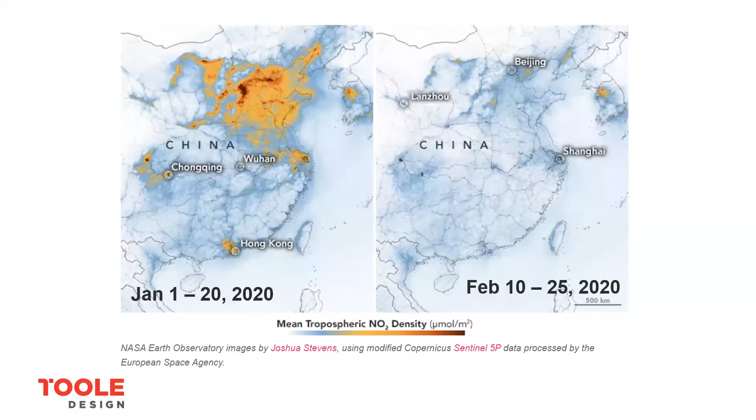Third, I want to address an issue right up front here. Several of our clients and colleagues have reached out to us to ask if we are suggesting strategies that go against orders that require people to stay at home, strategies that might result in more people outdoors and in close proximity to each other. And there have been concerns about people flocking to parks and trails and creating conditions where the virus can spread. In fact, I don't think that all health departments are necessarily in agreement about this, but clearly there are some outdoor activities that can be safe if we can do them in a way that's physically separated from others.

So no, we're not suggesting that people congregate in the same place at the same time. Rather, we want to create conditions where there are many more safe places for people to walk, bike, and run, using safe distancing strategies. We need more space, not less space, for these activities. And we also need to acknowledge that there's a critical window of time in the next couple of weeks where we need to be limiting interaction to the bare minimum. And we certainly need to be careful about doing things that could attract a lot of people to one location.

I think there's a few factors at play here that I want to talk about. We need to remember that physical activity and time outside of the house is absolutely essential for humans to maintain their physical and emotional health. There are volumes of scientific research that tell us that being outside and experiencing nature, even if it's just a street tree, brings a wide variety of physical and mental benefits to humans, in fact, boosting our immune system. Even as little as 30 minutes of exercise a day, a simple walk, boosts our immune systems and makes us healthier. So we need to find ways to enable people to safely go outside.

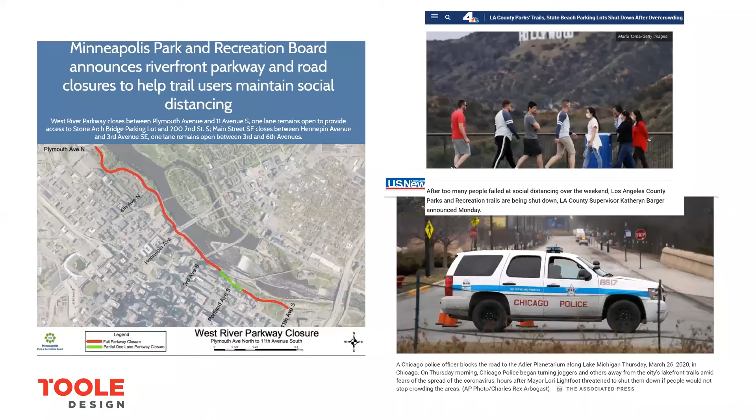Thinking ahead again to a time when we've had extended periods of isolation and when businesses and workplaces are gradually reopening, having enough space on our streets and sidewalks is going to be important. We have an opportunity now to experiment with some things to prepare for that time.

Finally, when this is all over, there will be more people working from home than ever before, like your three presenters today - these are our home work environments. We'll have figured out it's possible to work from home and still stay connected to colleagues. I might have to invest in an actual desk instead of a card table, but a lot of people are predicting things won't go back totally to the way they were before the pandemic.

People who work from home are going to need to be able to access trails and safe streets and parks for their mental and physical health. Which brings us to the topic of the day: rebalancing streets for people.

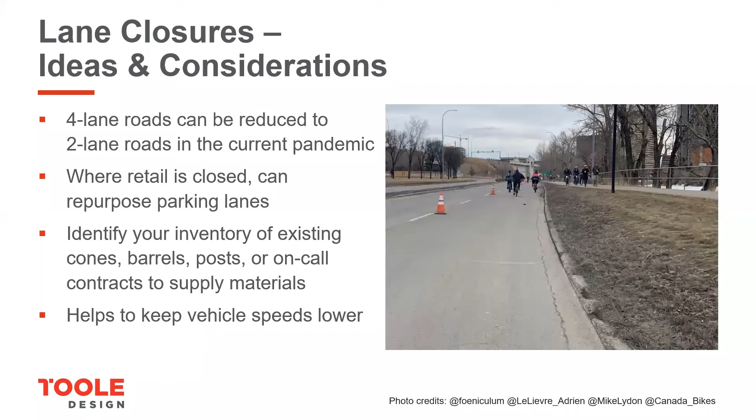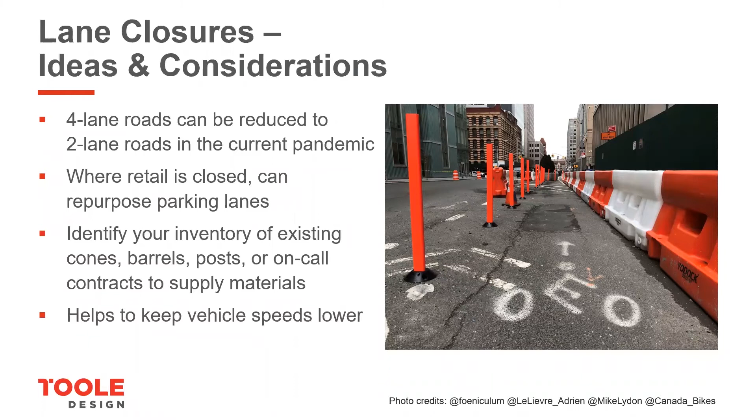The challenge with a lot of typical road diets is that we're often trying to go from 4 lanes to 3 lanes, and that often means changes in signal operations and changes in the locations of signal heads over the lanes—a whole lot of extra work we don't have time to implement in this crisis.

So we're looking for opportunities where we don't have to make those physical changes, and can essentially just cone off the outside lanes and provide that space as overflow from the sidewalks or dedicated bike space. We also have opportunities to repurpose some parking lanes in locations where retail is no longer functioning—not suggesting we close parking needed for drop-off, pickup, or commerce, but there are some locations where that parking could be repurposed.

The first step is to really understand what resources we have at our disposal: what cones, barrels, or potentially flex posts do you have in your existing stockpiles? What existing on-call contracts do you have with contractors, and what's already in their supply? These are the first calls that need to be made to understand what materials you have to work with, so we can understand how much can actually be implemented with these street changes.

The other potential benefit of changing these lane configurations is that we can narrow up the travel lanes and help control vehicle speeds, not only along the lengths of the corridors, but being deliberate to ensure turning vehicles are doing so at a safer speed where we know we have more people crossing the streets.

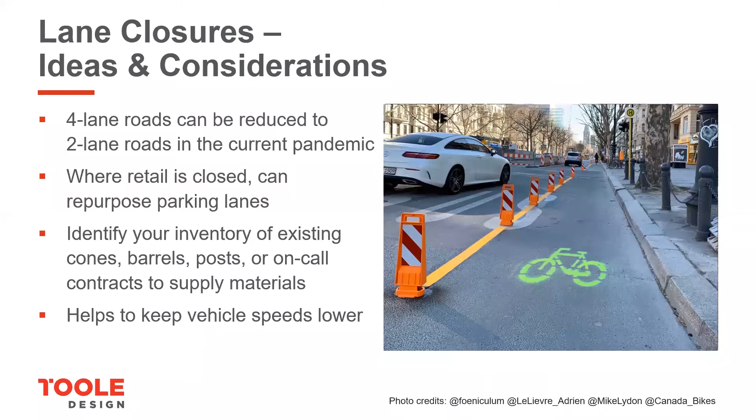There are some other considerations that are more context sensitive: we have to look at how the existing street networks are operating, and whether there are existing land uses along a road causing queues to form—people queuing outside grocery stores or other stores, forcing people out into the street because there's simply not enough space on the sidewalk. That's a natural opportunity to carve out these additional spaces.

We can also look to places that are already doing this—places with farmers markets or other regular events where public agencies are already frequently closing lanes and or closing streets entirely to vehicular traffic. We already have those plans at our disposal. Many communities have also done pop-up events, so we have traffic control plans and ways of setting up these roads that don't require a lot of physical implementation. We can pull these plans off the shelf and relatively easily implement them to provide these benefits.

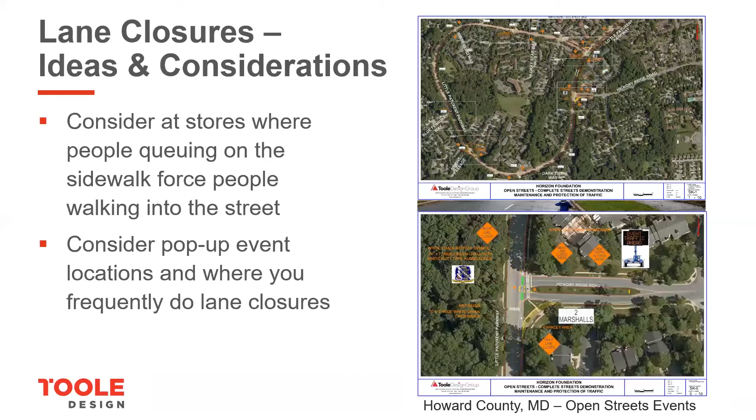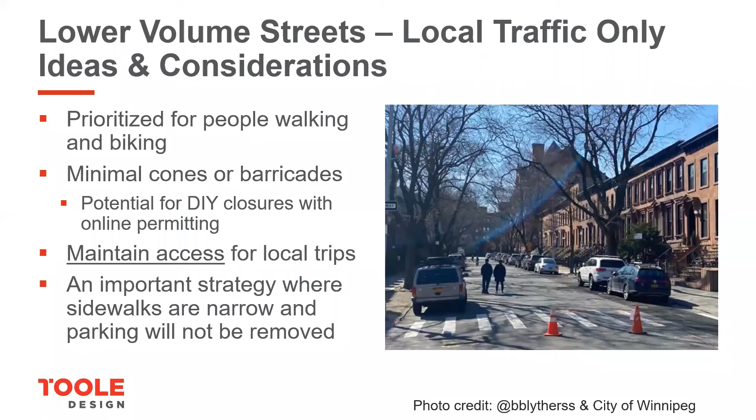We also have to recognize that not all roads are going to be 4-lane roads, and frankly some roads just don't have the volumes that would warrant significant changes. On a lower volume street, it would be fairly easy to just close that street off, indicate it's for local traffic, and allow that space to be a little more comfortable for people already using it for walking and biking.

These are also things that could be done with a relatively simple online permitting process—print out the permit, put it in a Ziploc bag, stick it on the back of a couple chairs, and use that to signify you've gotten permission to close off your street. This takes some burden off public works officials who are already dealing with a lot of other things, while still going through a formal process.

We do want to make sure that roads are not just being closed by residents without any sort of thought to an overall network or overall connectivity. We also want to make sure that we're focusing on local access because we have a lot of deliveries to these streets, so we need to be focusing on that as well.

And I sort of mentioned this before, but recognizing that we have to know where our streets don't have enough sidewalk width, and look for those opportunities to carve out the street space for people walking.

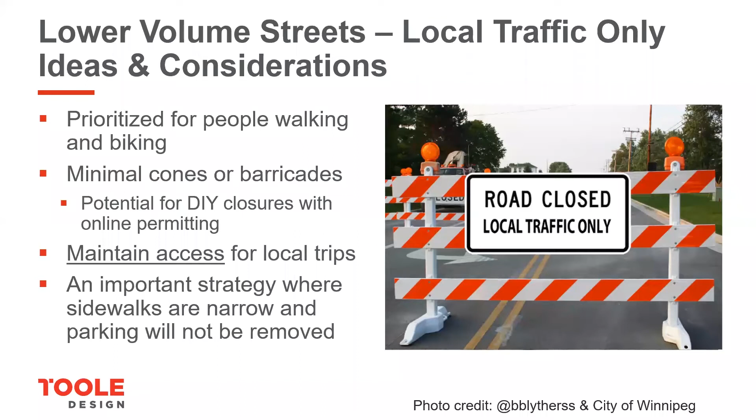We've also seen pretty much across the country that our shared use paths, which were in a lot of places already too narrow, are really feeling the burden of these types of changes, that you can't really accommodate social distancing with the volumes of users that are using these facilities. So looking for opportunities for parallel routes to these shared use paths, so that when people are naturally going to these locations, they already see that there's another opportunity to use a parallel facility and not have to come into close contact with other people.

We can also look for opportunities to separate bicyclists and pedestrians. This was already an existing problem on a lot of our shared use paths, but now with these increased volumes and a need to be more separated, it makes the need for separation even more important.

Another low-hanging fruit is we don't need people to be touching push buttons. I see that a lot of communities have already latched onto this idea, gone into their signal cabinets, and put the signals on pedestrian recall. Yes, it means there's some additional delay associated with the pedestrian crossings, but given that we don't have the volumes of vehicular traffic on these streets anymore, and we don't want people congregating on corners, making this change makes a lot of sense.

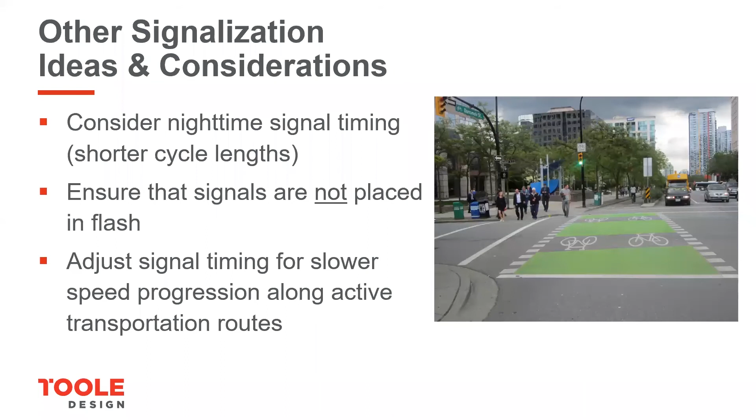And as I said, we don't want people congregating on intersection corners because it becomes more difficult to keep our separation. So keeping cycle length short—a lot of our signals already have nighttime signal timing that is set for shorter cycle lengths. We can flip that switch and use that throughout the day so that we don't have people grouping up on intersection corners and then similarly needing more time to cross because they have to leave those natural gaps between people. I guess I would discourage people from using signals in flash mode, particularly when you have lots of pedestrian traffic.

The caveat to that would be if you're switching it to flashing mode and it's functioning as a stop-controlled intersection—that may be an opportunity as well.

Another thing we can look at is for routes that we're going to prioritize as pedestrian and bicycle routes, we could look to adjust the progression speeds along those corridors. It might throw some of the timing out of whack in terms of the overall grid, but if we're going to prioritize a particular route as a pedestrian and bicycle route, it's something worth considering for those types of corridors.

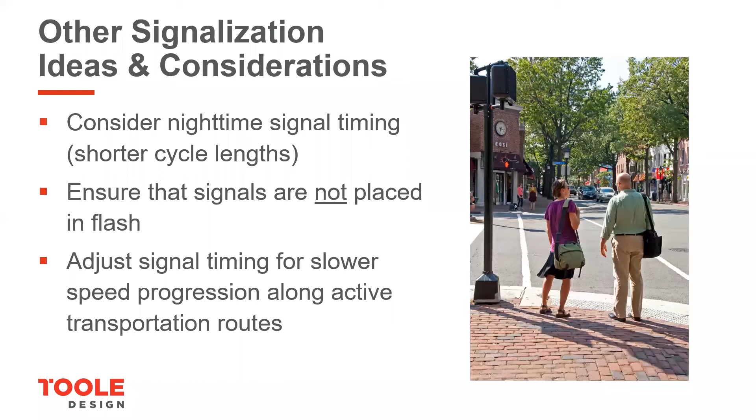Some other ideas—this first one at least will need to be very context sensitive—but there may be opportunities to move on-street parking to existing underused parking lots or garages, since these are currently unused spaces. If that's an opportunity in your neighborhood, you could move cars and then be able to repurpose that space on the street for people walking and biking. That's another potential opportunity.

We could also use, in addition to what I talked about before on closing lanes and ensuring at intersections that we're keeping speed slow, work zone type installations where we're lowering the speeds and clearly communicating what the expected operation is for motorists. This is really no different than what we're going to have to ask of bicyclists as well, that we need to be acting responsibly. We also need drivers to be driving responsibly so that we're not increasing the flow of people to hospitals. We need to really focus on speeds and reduce serious and fatal crashes at this time.

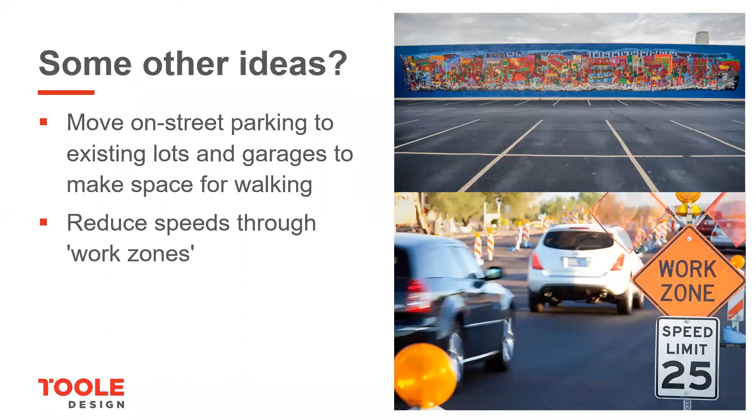So what are some of the planning considerations that we need to focus on? We've seen in some communities that park spaces are being closed because they're sort of natural gathering spaces—they're the places that people already want to go, and they just don't have the capacity to accommodate the number of people that are using them. By comparison, the routes that we're talking about—these carving out lanes and closing roads—they're not intended to be destinations.

They're really just to provide people this location to be able to move along a street, get to their destinations, whether it's the grocery store or just to get a little exercise, and not really to gather. There are ways we can structure these configurations of road closures and lane closures so we're giving people natural loops to get exercise. That can be part of the messaging—for example, doing one loop of this laid out route would be the equivalent of about 30 minutes worth of exercise.

So having that clear messaging of what the purpose is of this facility and how people are supposed to be using it. But as we're laying out this network, we should also be thinking about ensuring we're providing access to essential services, whether that's people walking from their house to the grocery store or ensuring that the people who work at these places are able to get there.

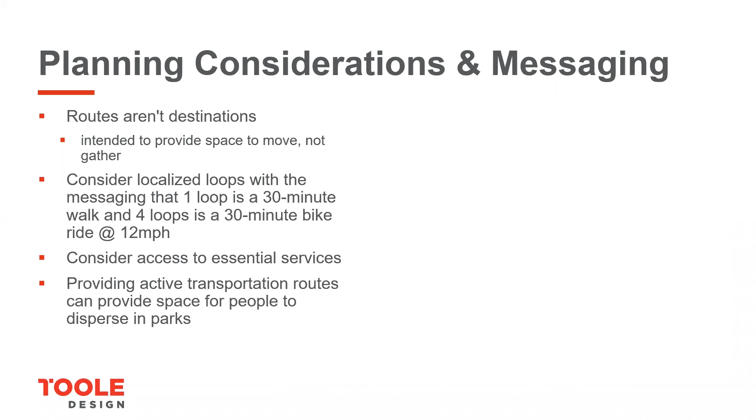One other aspect of this is that doing this may free up public space, so public parks may not be as overburdened, and adjacent trail networks may not be overburdened because we've carved out the space. This is what we've seen places like Minneapolis doing. The city of Philadelphia similarly did it with some of their park frontage roads, repurposing space that was already being underutilized.

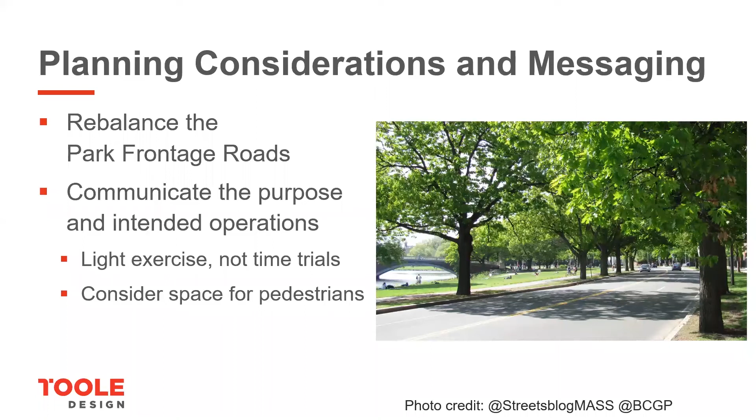As I said, we should be communicating what that purpose is. We're not looking for that time trial cyclist, the person training for a triathlon, to get out there and be traveling quickly—it increases your risk of crashes, particularly with the increase of people using these facilities. We're really just intending for this to be some light exercise so people can get their heart rates going, get a little sunlight. I know those in Minneapolis have gone through a long winter and are really itching to get out of their houses.

And as Jennifer said, you can't keep people indoors for eternity. So we're sort of planning for that.

In addition, as I talked about with shared use paths, we can think about carving out separate spaces for pedestrians and separating them from bicyclists, because we have two different users of different volumes and different speeds. When we allow them to mix at too high volumes, we're either going to create too close contact or this challenge of increased crash risks between those users.

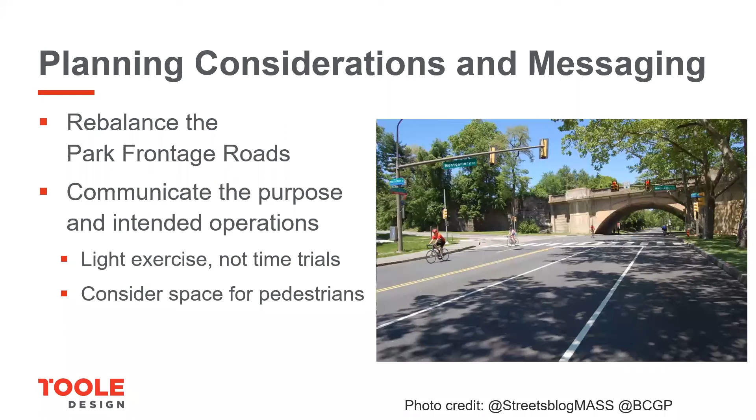That's why it's important to be thinking about providing accessible routes for these communities so that they have the same opportunities to get out and do some active transportation and breathe some fresh air.

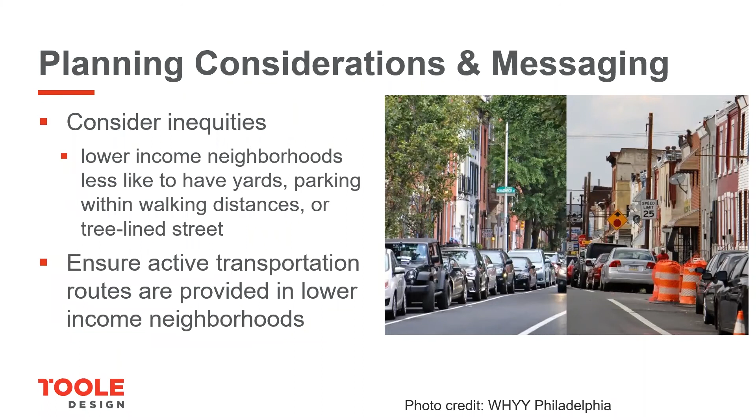I cannot overstress the importance of clearly communicating what the intended operations are for these facilities, whether that's through signage—so the city of Arlington made it clear that the trail systems were closed to group rides. That's going to be really important.

Providing guidance on maintaining social distancing—one of the questions we received prior to this presentation was people asking whether you should mark the entire length of these corridors to clearly communicate social distancing. I think that may be a little too much, but we can provide visual cues at the beginning of these routes that illustrate what 6 feet looks like, so people can commit that to memory and be naturally guided by this.

I think we as agencies also need to be looking at getting feedback on how these facilities are working. You can use social media to monitor it, encourage people to use hashtags, so that even if your agencies aren't able to get out and do actual observations, just combing social media and seeing photos and written guidance about what people are seeing and saying will help us better understand how these are working and make adjustments as necessary.

We can also repurpose all the materials that bike advocates and other groups have already prepared, tips on safe cycling—that's the type of material that can be repurposed.

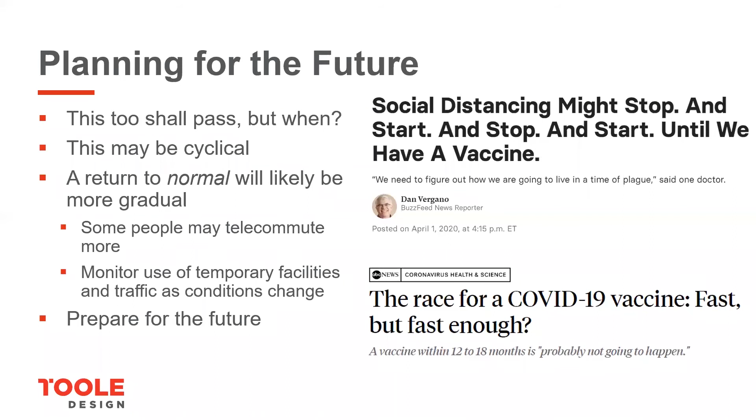And then finally, as we do move out of this, we need to be thinking about implementation strategies for the future, and how over the summer we could potentially build out some bike networks that have a little bit more permanence, but are going through a formal process.

One thing we want to stress with all of this is we're suggesting making changes to the streets as an emergency measure. We are not suggesting this is a way of cramming some infrastructure down people's throats without a formal public engagement process. This is really important to stress when discussing these types of facilities with the public—that if we were going to implement this permanently, we would go through the normal process.

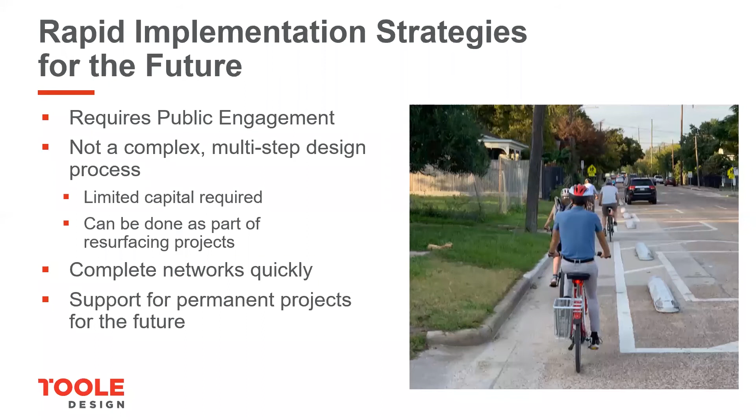By following rapid implementation, you're not building curb lines, you're not doing things that are going to cost a lot of capital, and it can be rolled out quickly to complete these networks. And I think that's what we need to have in the back of our minds to set us up for the future. With that, I'll turn it over to Gwen to talk about some public engagement.

Hello everyone. One of the questions I'm going to be talking about is how do we ensure the public has a voice in any of the decisions that are made now? Some key points: the main thing is that you have to be transparent around the decisions you're making. There should be rationale and some explanation for why you're doing what you're doing. You should also solicit public input on where additional space may be required.

As has been noted throughout this presentation, apply the changes consistently throughout communities. There are inequities being brought to light via this situation, and we need to make sure that through these efforts we are addressing those head on. One particular note is that it's important to continue focusing on equitable outreach more than ever—there are many people who aren't familiar with digital outreach or don't have access to participate, so that will be important.

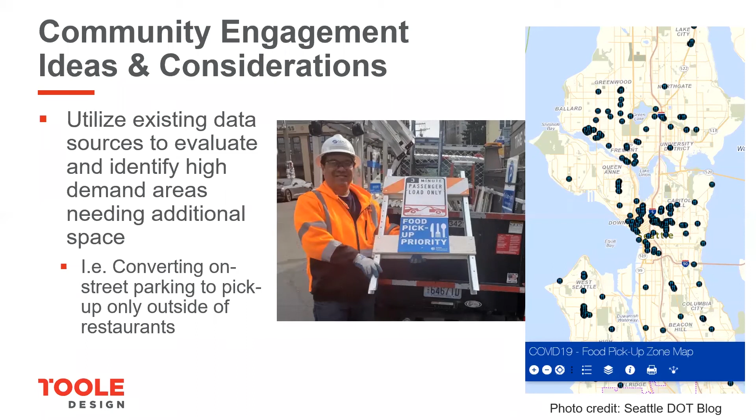Zoom and other tools have a lot of different features, and I think they're going to continue to come out with more as we enter this time. As these changes get implemented, it's important to continue to involve key stakeholders in the process and decision making. With the focus of reaching typically underserved communities, engagement will be challenging, but that does not mean it shouldn't occur.

Setting up community partners could be an additional way to alleviate city staff. Those community liaisons could reach out to the community virtually and host virtual meetings.

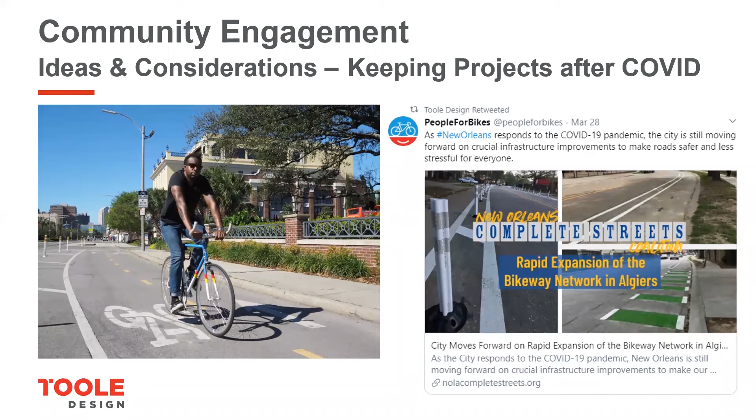This is not the time to be advocating for bike and pedestrian projects in the traditional sense, but capacity pending, it may be a good time to show what's possible in the future. Existing resources and outreach efforts may be possible to use for current projects or adapted quickly and easily as resources to apply those projects and efforts distributed throughout the community.

Luckily, there are a lot of precedents to point to for examples of rapid implementation. Pre-COVID, the concept was known by many different names: rapid implementation, quick builds, demonstration projects, pilots, pop-ups, tactical urbanism. Though the context and application is completely different for today's crisis, the principles from this implementation approach are very valuable. The resources will need to be adapted, but there's many to pull from.

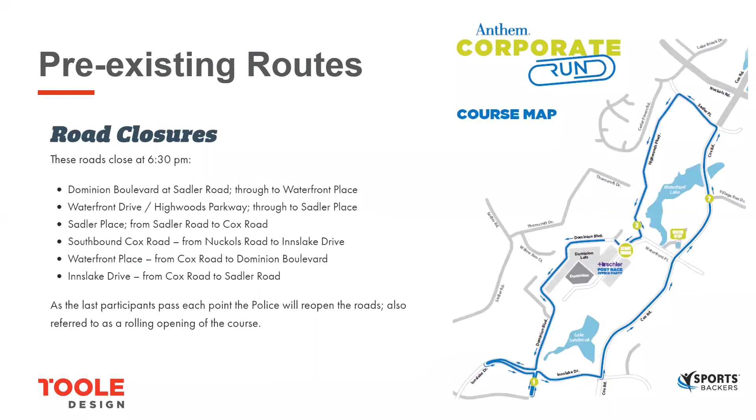We can also think about pre-existing routes. Pretty much every community has ready-made courses and routes that are closed down for events and parades, or 10K and 5K runs. We may already have traffic control plans in place for these yearly events that we can draw upon.

But we also need to think about local streets that we can repurpose as walking and biking streets. We can plan these in areas where there are other easily accessible alternative routes for emergency access.

We need to think about the time of day of restrictions and also consider the capacity of our local public works staff. Just like everyone else, their responsibilities are changing during this pandemic. We need to look at their workloads and make sure they have the capacity to implement these solutions, and also make sure they are safe while doing those things.

There are a lot of resources available and growing by the day. In addition to social media, sites like Streets Blog and Strong Towns are other resources to see what communities are doing. NACTO just launched a resource guide, a place to catalog what transportation agencies are doing in response to COVID-19. Tabitha Combs at UNC is compiling a list of cities making space for social distance for pedestrians and bikes. We'll send out a link after the webinar to all of these resources.